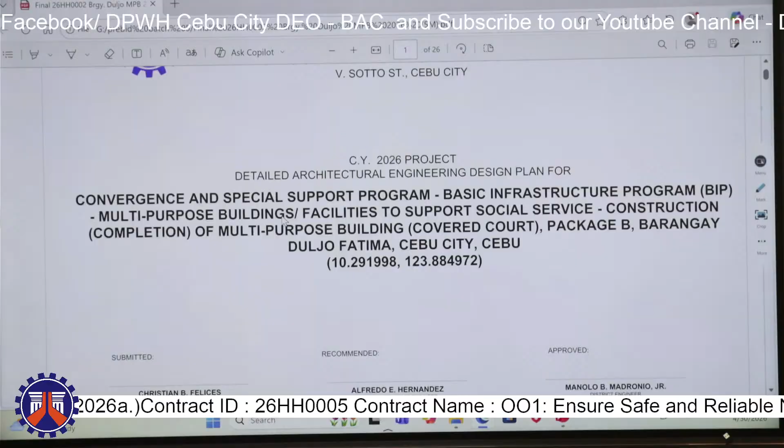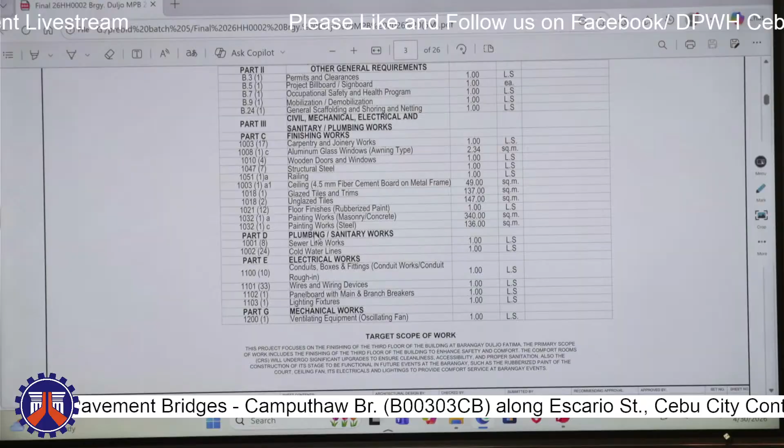The main scope of this project is the completion of the covered court at the third floor, the installation of the steel stage and railings, installation of tiles at the stairs and the CR, and the rubberized paint at the court, plus plumbing works, electrical works, and installation of the ceiling fan.

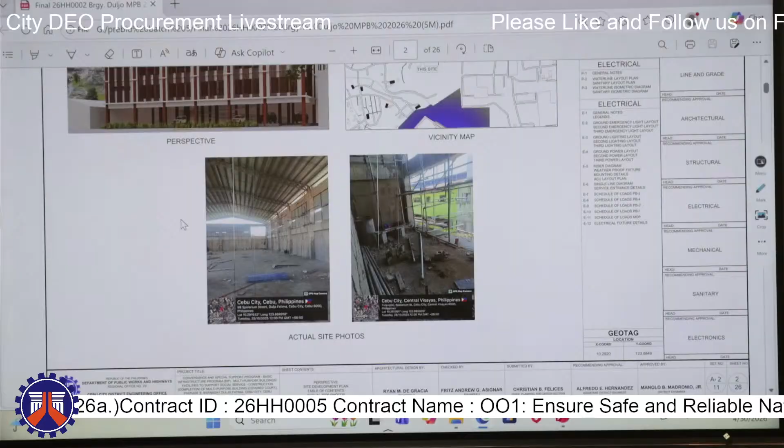This is the floor plan, the CR plan, the steel stage details, railing details, and these are the actual site photos.

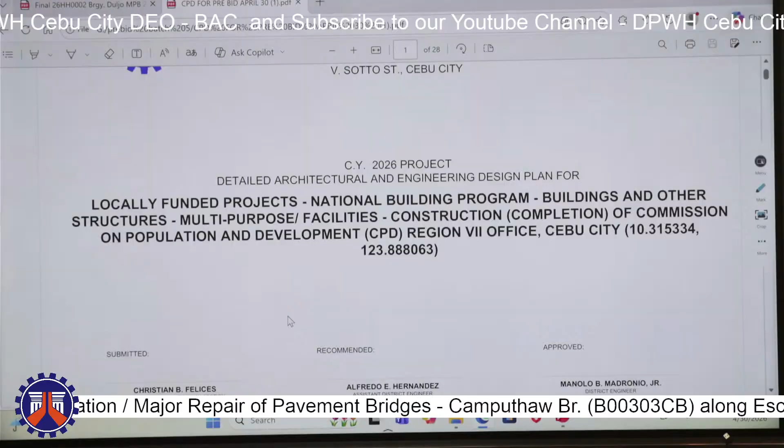Next project is locally funded, National Building Program, buildings and other structures, multipurpose facilities - construction, completion of Commission on Population and Development, CPD Region 7 Office, Cebu City.

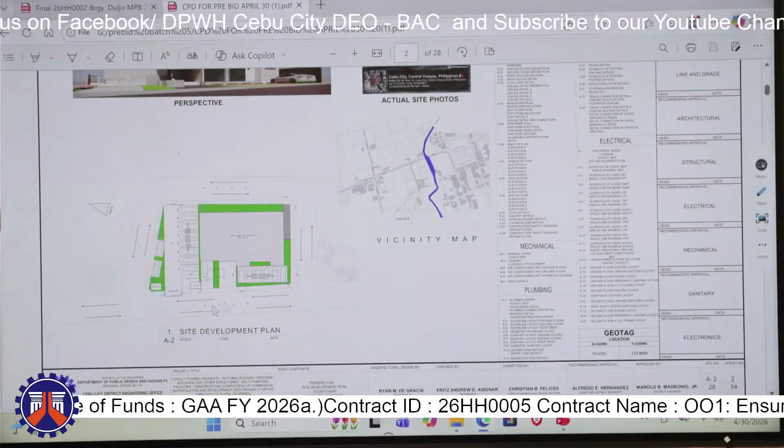This is already the completion phase of the remaining works from the previous projects. We have the perspective, the actual photo on site, the site development plan and vicinity map, then the summary of quantities and target scope of work.

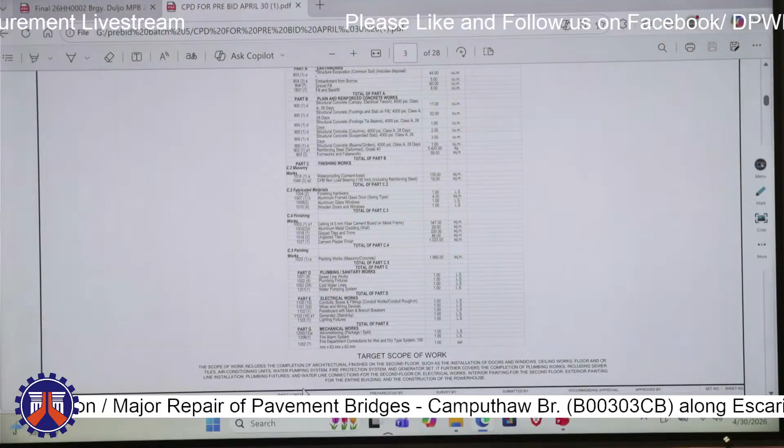The scope of work includes completion of architectural finishes on the second floor, such as installation of doors and windows, ceiling works, floor and CR tiles, air conditioning units, water pumping system, fire protection system, and generator set. It further covers completion of plumbing works, including sewer line installation, plumbing fixtures, and water line connections for the second floor, plus electrical works, interior painting for the second floor, exterior painting for the entire building, and construction of a powerhouse.

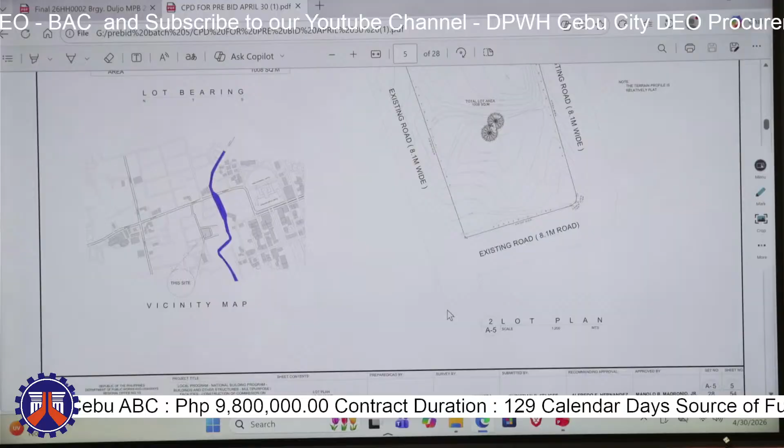Looking at the site development plan, the scope also includes concreting of the parking lot area, shown in this area here. The powerhouse to be constructed will be located on this corner.

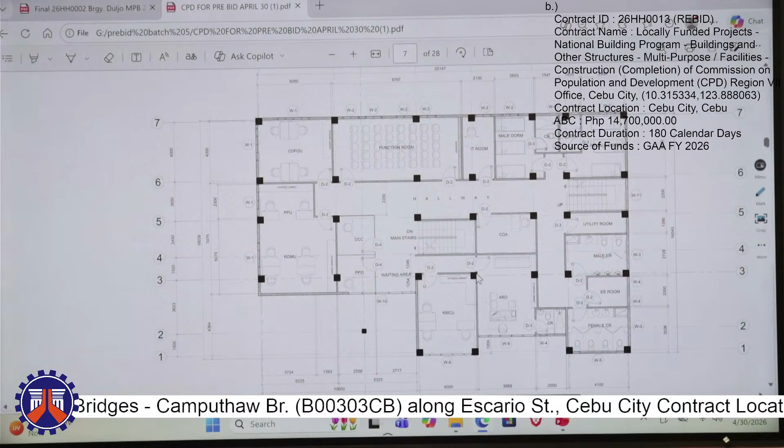Then we have the second floor plan. The scope for the second floor includes architectural finishes from floor to ceiling works - tiles, plastering of the walls, painting, installation of ceiling, installation of doors and windows, plumbing works for the second floor, electrical works, and fire protection system.

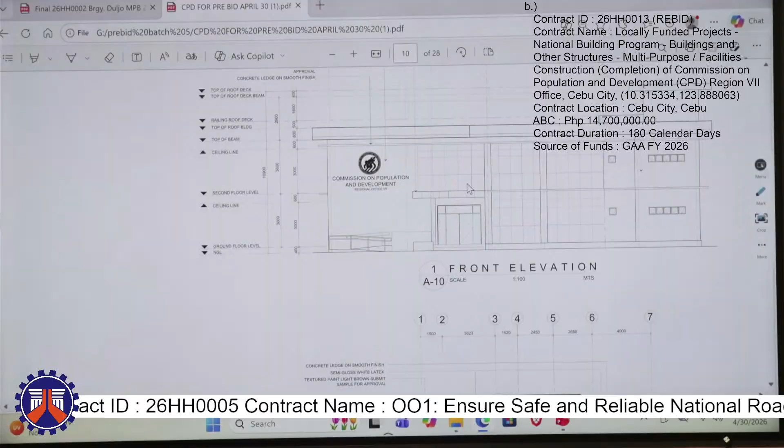Then we have installation of the water pump, and it also covers painting for the entire building - front, right, rear, and left side. That's all.

Next, the third building project is titled Locally Funded Projects, National Building Program, Buildings and Other Structures, Multipurpose Facilities - Construction of Cooperative Development Authority, Extension Office, Sudlon, Barangay Lahug, Cebu City.

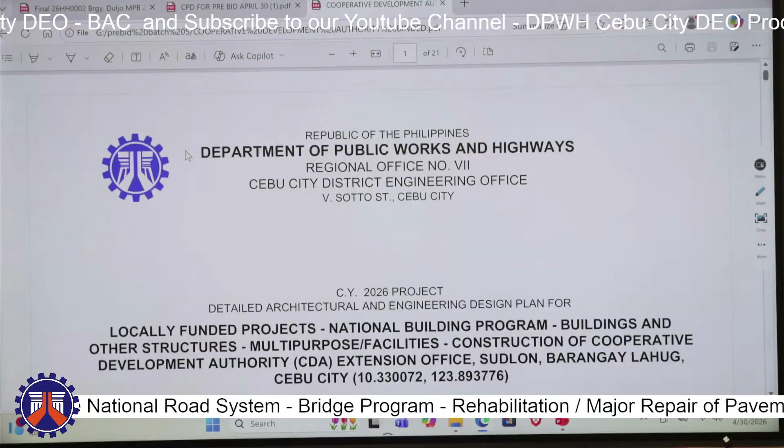This is the perspective, the vicinity map, and the lot plan. For the scope of work for the ground floor, it includes the backdrop of the RD's office, then the cabinets of the supervisor, registration, and finance.

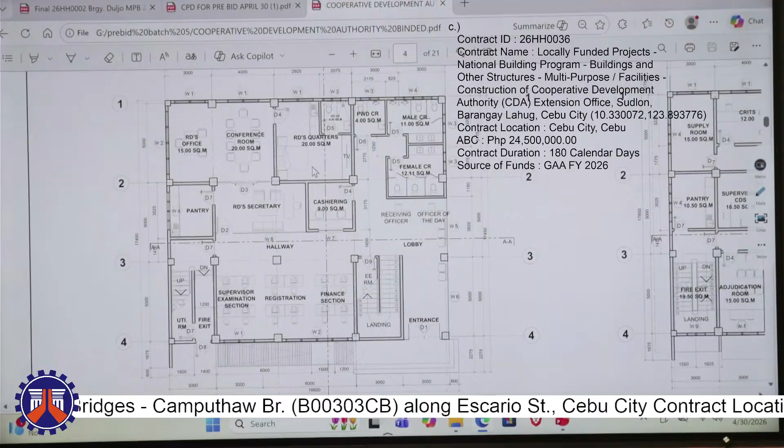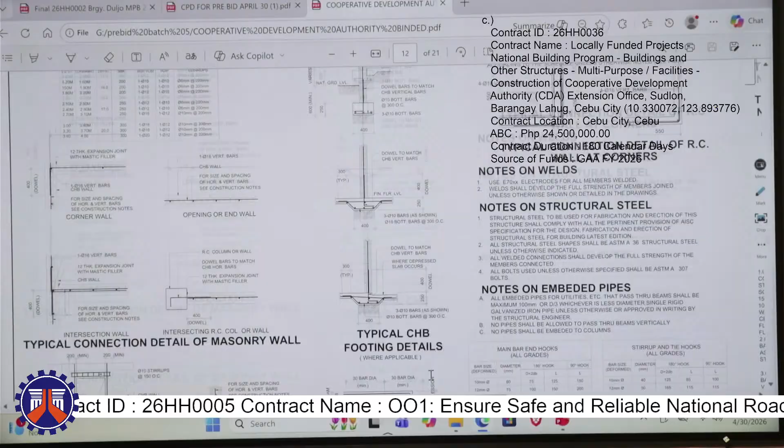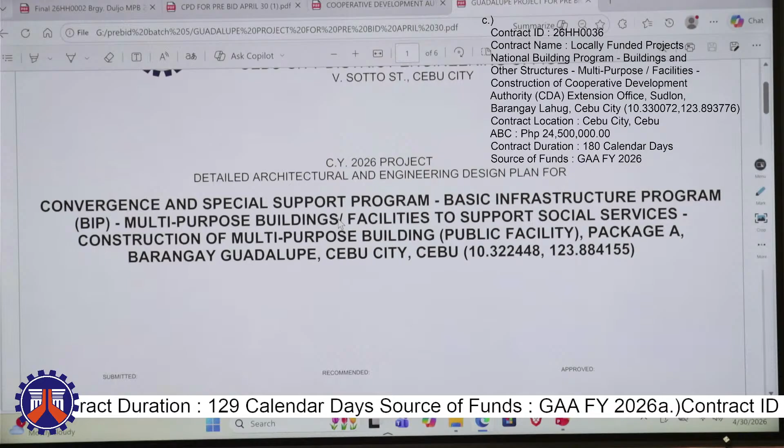Next project is Convergence and Special Support Program, Basic Infrastructure Program, BIP, multipurpose buildings or facilities to support social services. Construction of multipurpose building, public facility, Package A, Barangay Guadalupe, Cebu City, Cebu.

Here's the perspective of the project. This is a new construction of three-story, one basement, multipurpose public facility. The basement is designated for parking area.

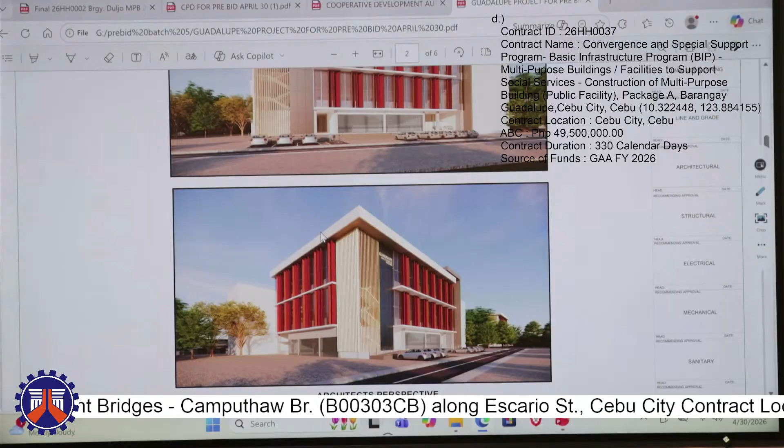For the ground floor, we have the commercial spaces at the front, then dry and wet market area at the back. We also have a mortuary on the left side.

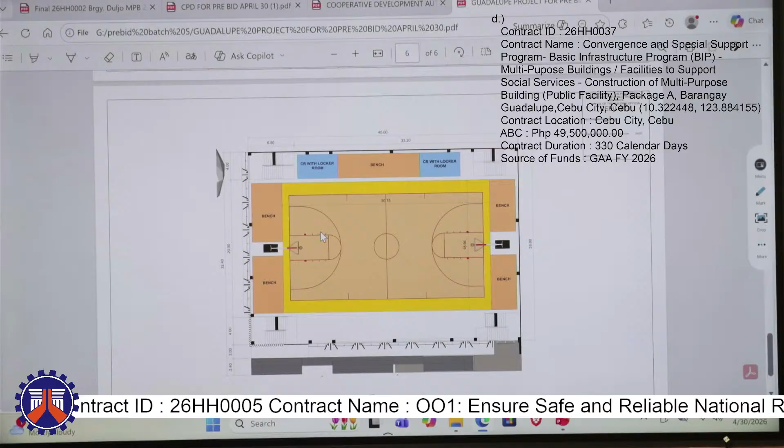For the second floor, it is an open area. Then the third floor has a full-size basketball court, which can be used during sports-related events or even to carry out community events or activities.

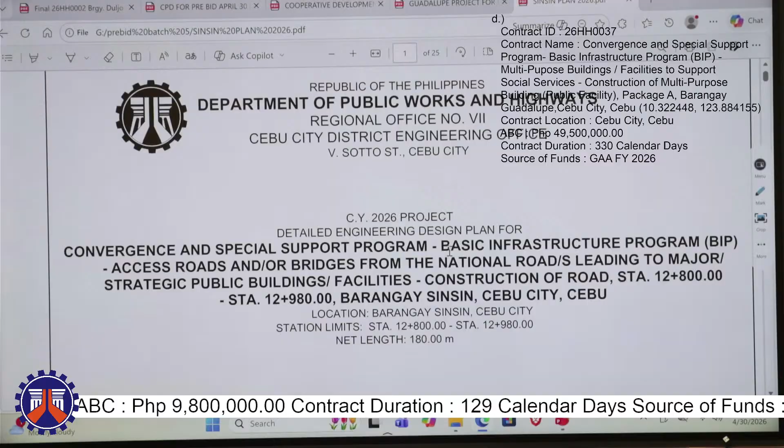Good afternoon, everyone. I'm here to discuss the project titled Convergence and Special Support Program, Basic Infrastructure Program, Access Roads and or Bridges from the national roads leading to major or strategic public buildings or facilities. Construction of road Station 12 plus 800 to Station 12 plus 980, Barangay Sinsin, Cebu City, Cebu, with net length of 180 meters.

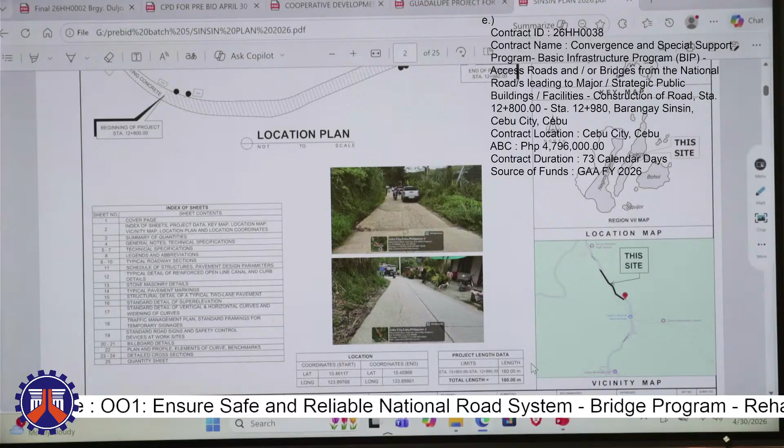So this is the location plan, also with the geotag photos to navigate to the location easily, as well as the vicinity map.

Here's the summary of quantities with the major scope of work being concreting of road. It also includes line canal on the left side, as well as concrete curbs, stone masonry, and pipe culvert to drain, RCPC.

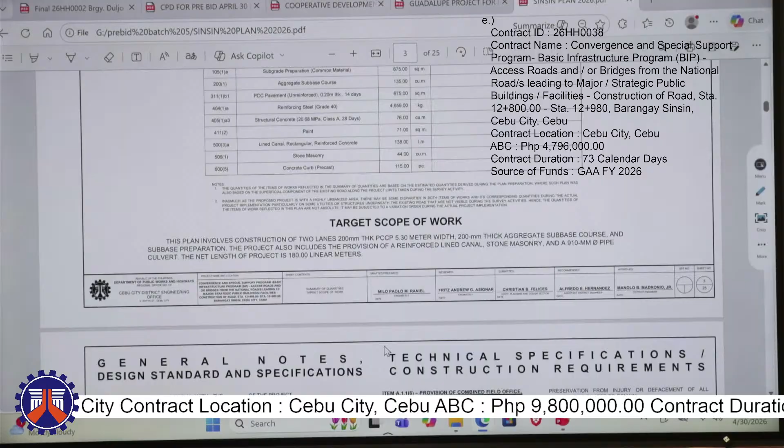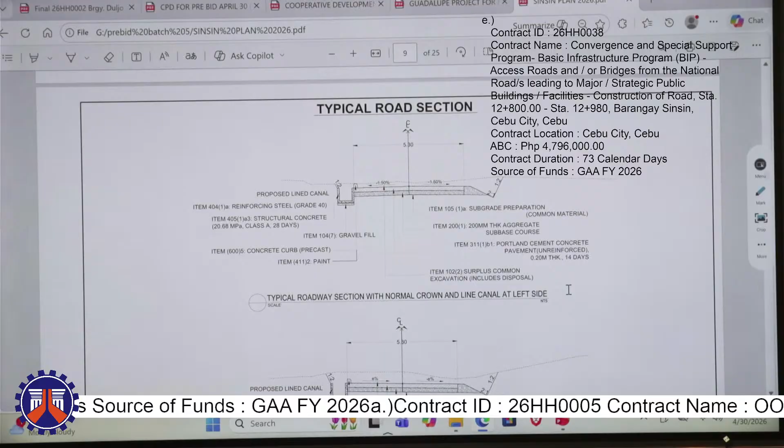So these are the general notes as well as the technical specifications included for this project, abbreviations and legend. For the typical roadway section, this is the typical roadway section with the normal crown and line canal on the left side. And here you will see the section with stone masonry on both sides as well as RCPC.

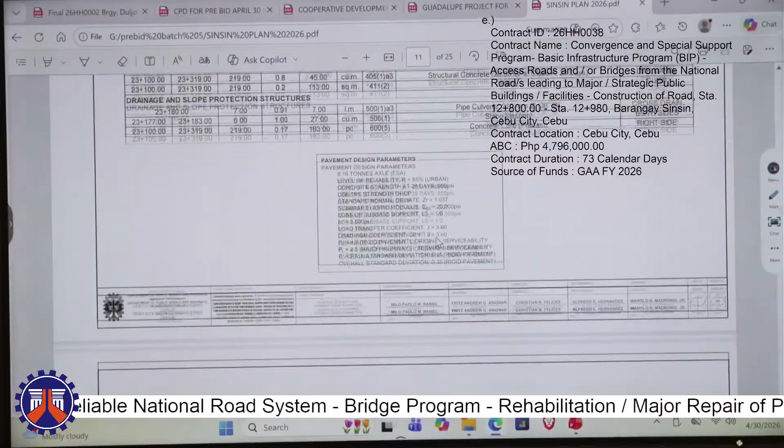910 millimeter RCPC. These are the schedule of structures for the curb and the line canal, typicals, stone masonry, typical pavement markings, standard detail of two-lane pavements.

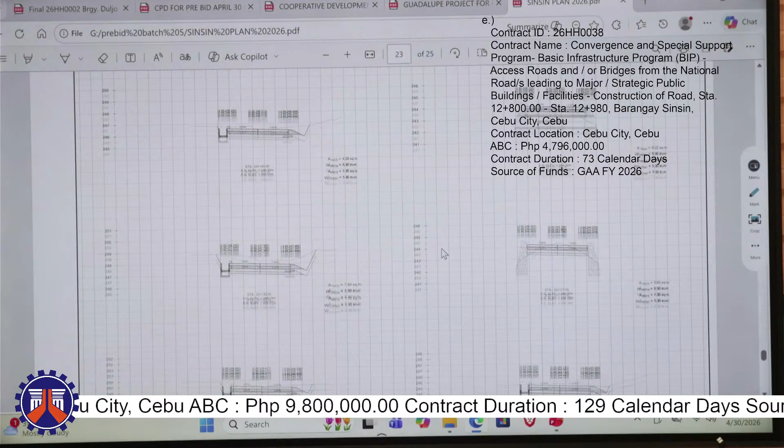This is for the super elevation, as well as the curves, the traffic management plan, road signs and safety devices, billboards, and here's the profile for the project, as well as the detailed cross sections and the detailed quantity calculations. That is all.

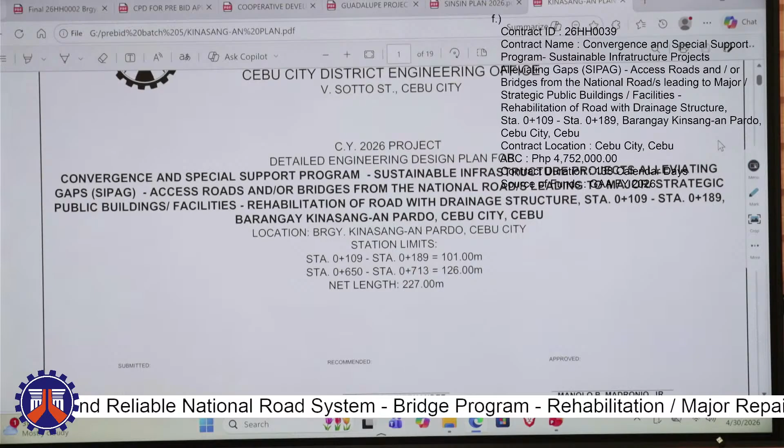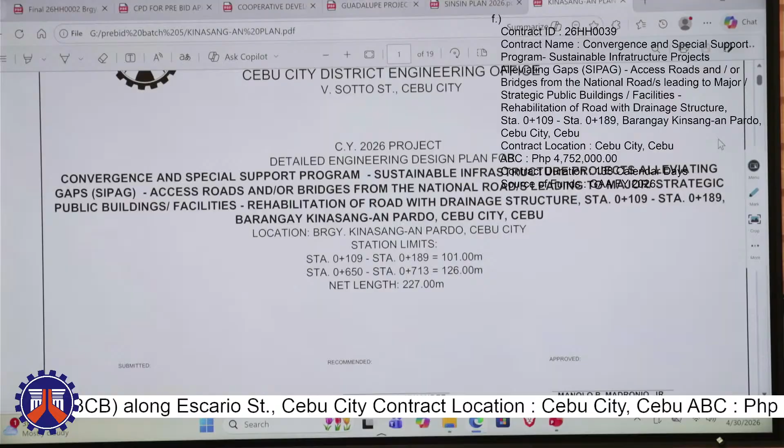Next is Convergence and Special Support Program Sustainable Infrastructure Projects Alleviating Gaps, Access Roads and or bridges from the national roads leading to major strategic public buildings or facilities, rehabilitation of road with drainage structure station 109 to 189 in Barangay Kinasang-an Pardo, Cebu City. Station limits station 109 to 189 in the length of 101 meters.

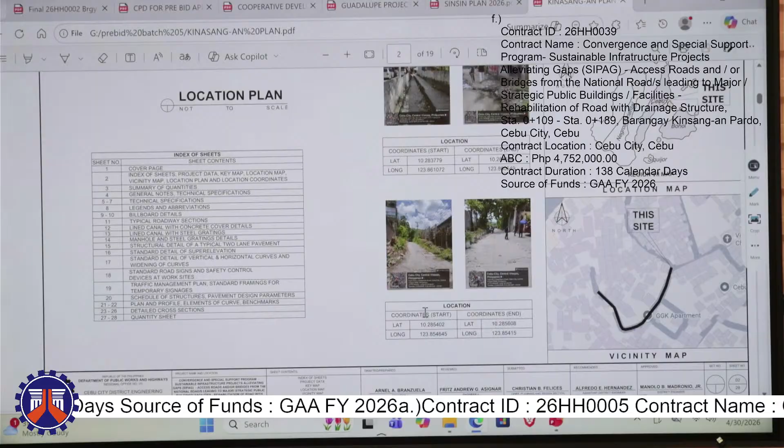Station 650 to 713 with a total length of 126 meters and a net length of 227 meters. This is the location plan of the site and geotag photos with coordinates for section 1, and for section 2 we also have the geotag photos and coordinates. Next is the summary of quantity.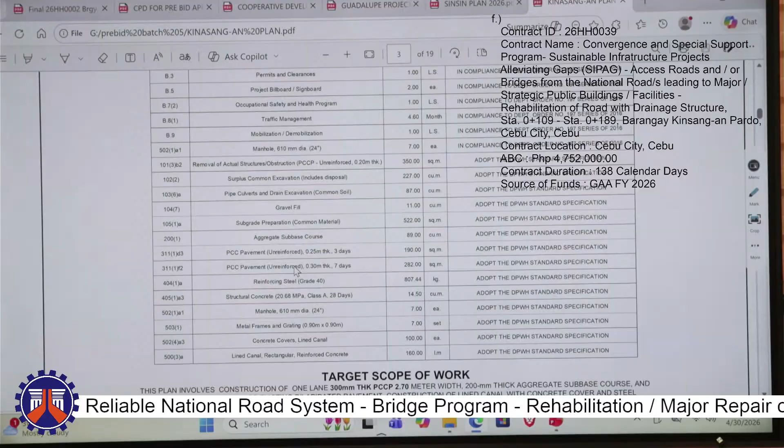Major scope of work is removal of PCCP 0.20 meters thick and PCCP 0.25 meters, and construction PCCP 0.30 meters thick, and for the reinforcing steel grade for the top slab of the line canal and also for the structural concrete. We also have manholes and steel gratings and line canal rectangular for reinforced concrete. So this is the general notes and technical specifications needed for the project.

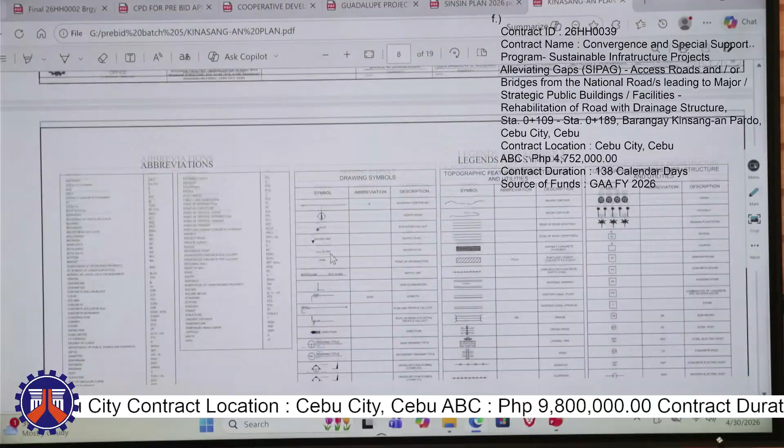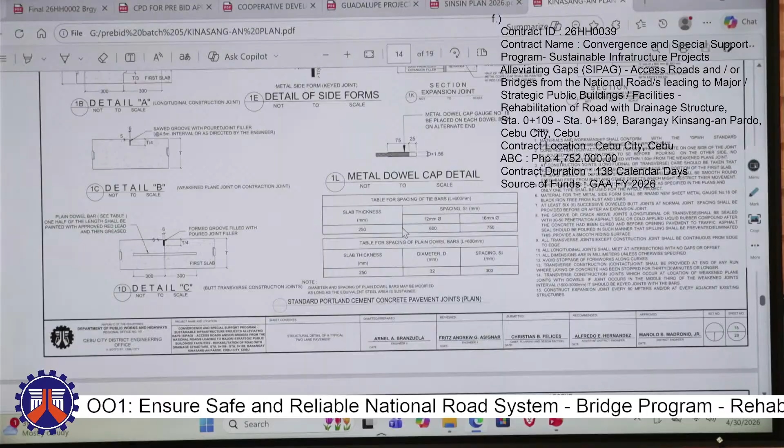This is the structural detail of typical two-lane pavement for the super elevation and curves, road sign and safety, and also the traffic management. And this is the schedule of structures.

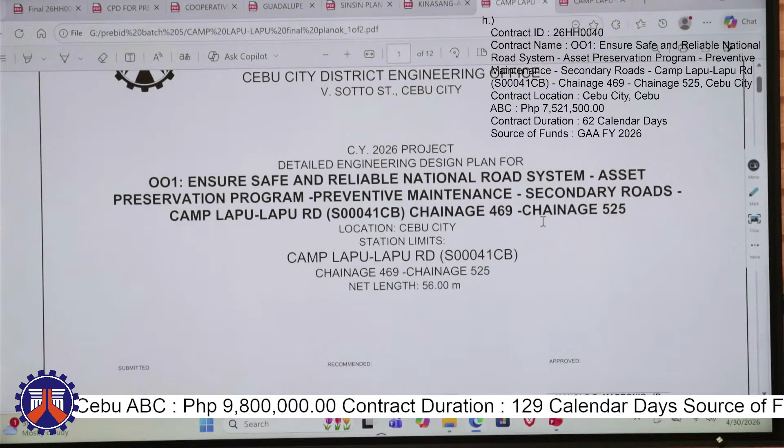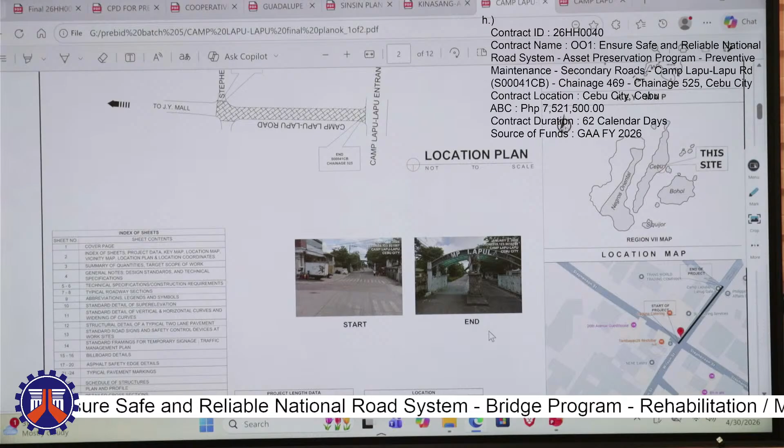The next project is a road project titled OO1 Ensure Safe and Reliable National Road System Asset Preservation Program Preventive Maintenance, Secondary Roads, Camp Lapu-Lapu Road, Chainage 469 to Chainage 525. Its net length is 56 meters. The location of the project is the junction before the Camp Lapu-Lapu entrance and its end is the Camp Lapu-Lapu entrance. Coordinates are provided as well.

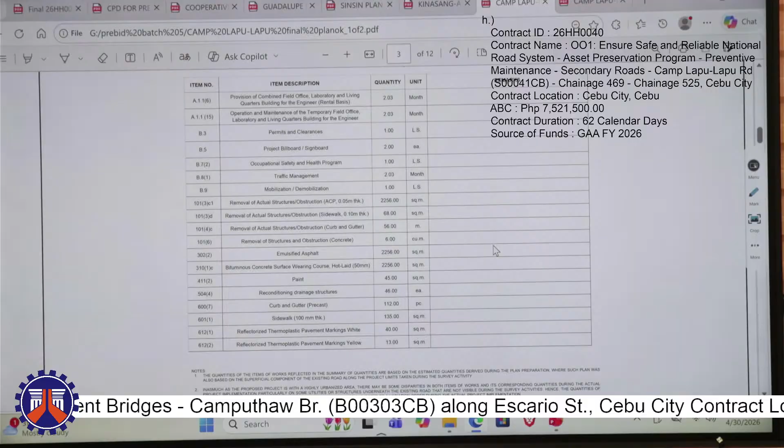For the major scope of work, it involves removal of existing asphalt, existing sidewalk, existing curb and gutter, and removal of existing concrete. Emulsified asphalt, bituminous concrete surface, wearing course, hot laid, paint, reconditioning of existing drainage, precast curb and gutter, sidewalk, and reflectorized thermoplastic, both white and yellow.

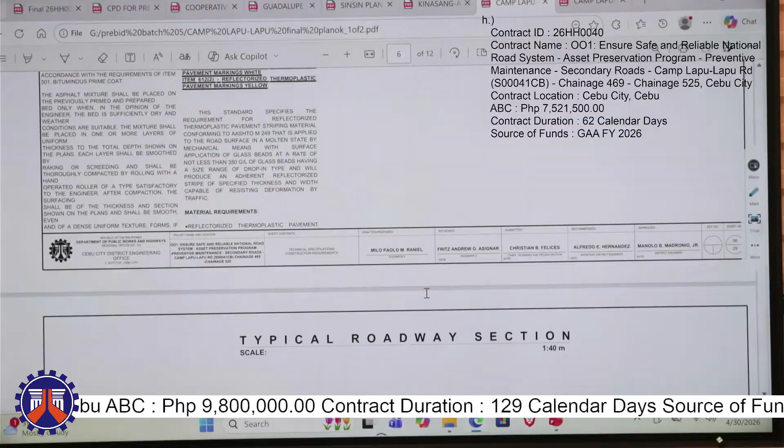These are the technical specifications of the project, and this would be the typical cross section for the project. That's all.

Next project, we have Convergence and Special Support Program, special road fund, motor vehicle users charge, MVUC, as per RA 11239. Installation and application of road safety facilities, roadway lighting along J. Luna Avenue.

Section S00024CB, chainage 000 to chainage 1508; S00324CB, chainage 000 to chainage 144; S00330CB, chainage 000 to chainage 1501, with a total net length of 3,153 meters.

Our project starts at San Jose de la Montaña Bridge going to the Archbishop Flyover, at the junction of Salinas and Governor Cuenco.

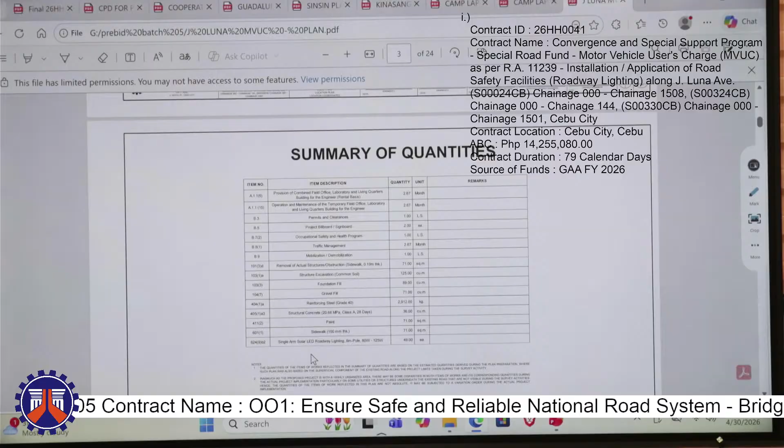So our summary of quantities. Since our project is roadway lighting, we have single arm solar LED roadway lighting. We also have structure excavation, removal of sidewalk, and for the restoration works, foundation fill, gravel fill. For our pedestal, we have reinforcing steel, structural concrete, paint, and sidewalk.

This one is the general notes and technical specifications involved in this project. Next, legends and symbols, then our typical roadway sections.

We have first solar street lights installed on both sides, then this one is for staggered arrangement.

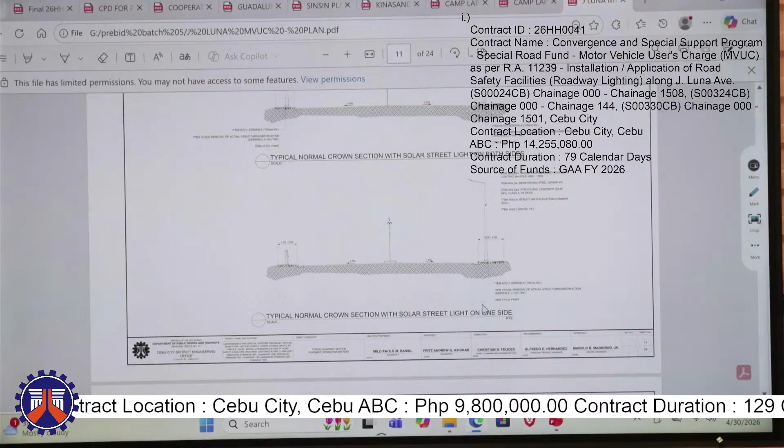Next is our site development plan, our schedule of structures, then details of our sidewalk. Then this one is the general notes for our roadway lighting.

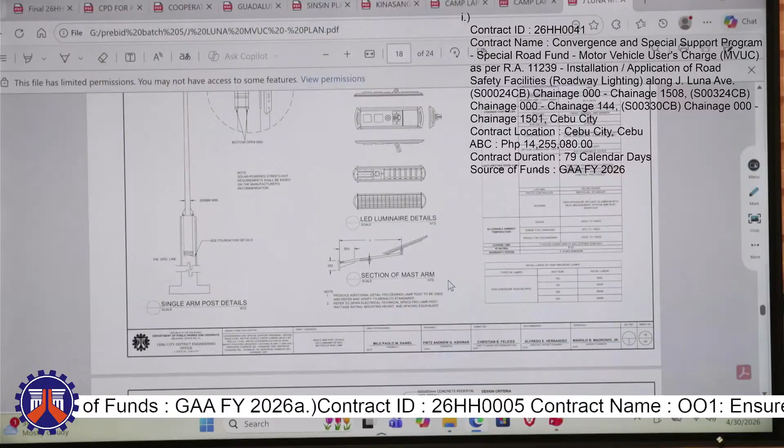Then details for our LED lighting, details for our pedestal. This one for our arrangement of the lighting layout. Then our traffic management, then billboard details. And that's all for this project.

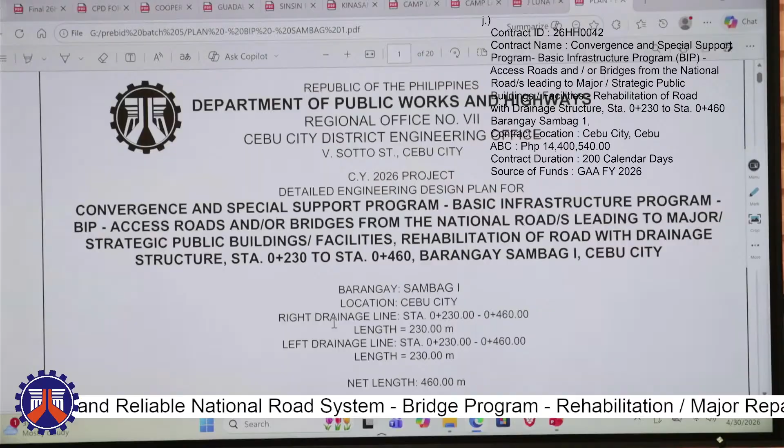Good afternoon, everyone. For the next project, titled Convergence and Special Support Program, Basic Infrastructure Program, BIP, access roads and/or bridges from the national roads leading to major strategic public buildings, facilities, rehabilitation of road with drainage structure, Station 230 to Station 460, Barangay Sambag-Uno, Cebu City, with an ABC amount of 14,400,540 pesos and 200 calendar days.

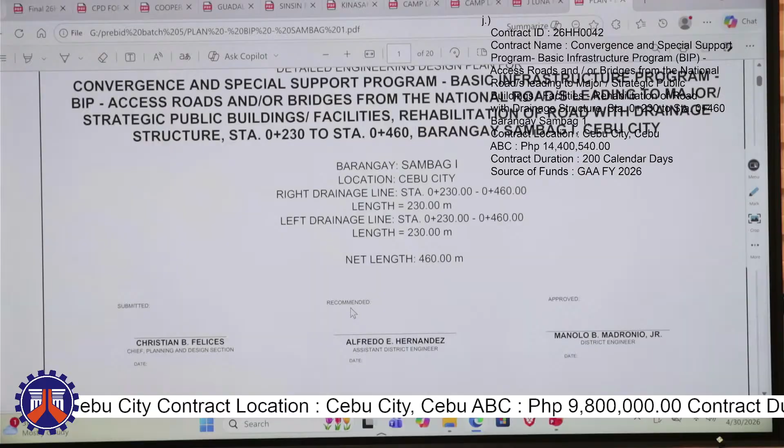The location is on Barangay Sambag-Uno, Cebu City, with drainage line 230 and 460 on both sides, with a net length of 460 meters. Here's the location, the project will start at station 230 and end at 460 on both sides. Here are the location and geotags for easier navigation of the project and also the limits.

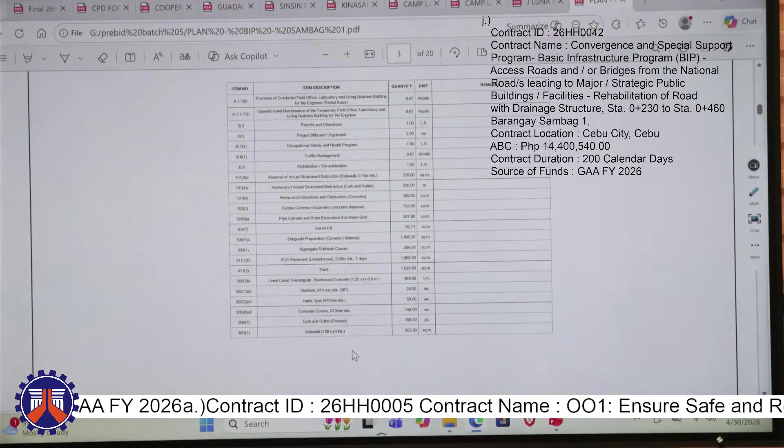For the major scope of works, we have removal of actual structures and obstruction for sidewalk and curb and gutter, also for concrete, surplus common excavation, pipe culverts and drain excavation, gravel fill, subgrade preparation, aggregate sub-base course, PCCP, paint, lined canal, manhole, inlets, concrete cover, curb and gutter, and sidewalk.

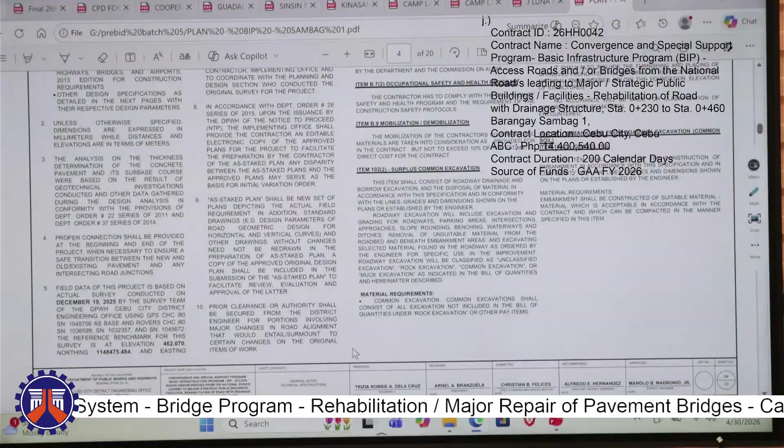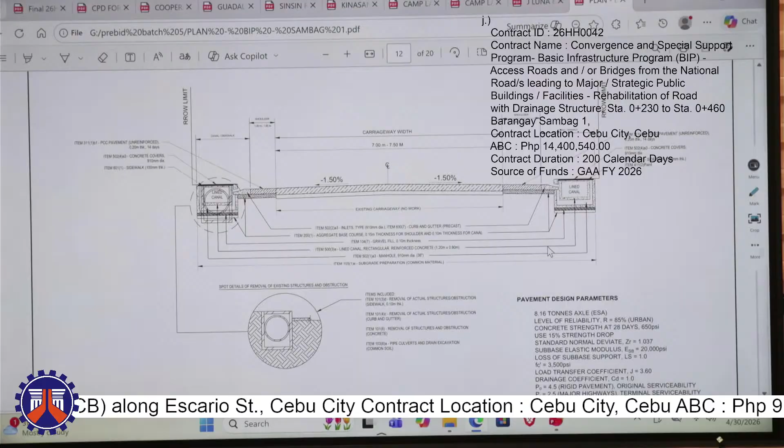We will move on to the typical roadway section. Here is a typical roadway section. Again, for both sides, it will be construction of a shoulder with lined canal and manhole with sidewalk. Here is the schedule of structures for the whole project. And that will be all for this project.

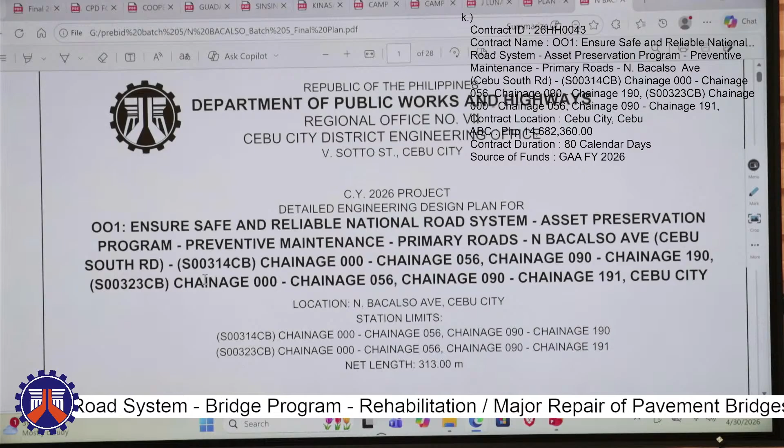So for the next project, we have here titled O1 Ensure Safe and Reliable National Road System Asset Preservation Program, Preventive Maintenance Primary Roads in Bacalso Avenue, Cebu South Road. The first section will be S00314CB, chainage 0 to 56, chainage 90 to 190, and then another section ID 323CB, chainage 0 to 56, chainage 90 to 191, Cebu City.

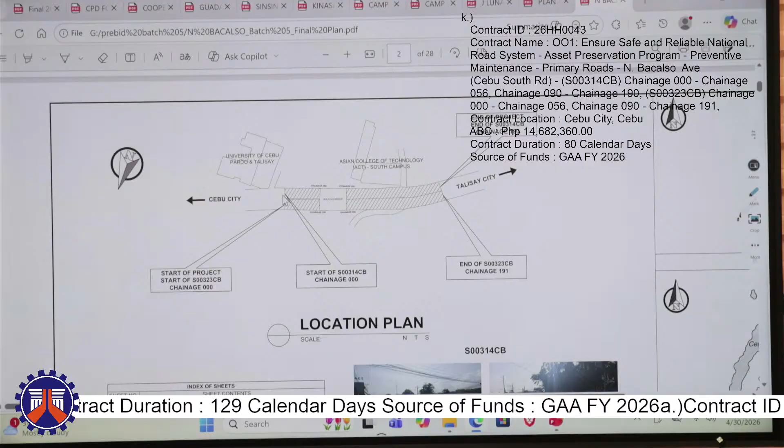Location in Bacalso Avenue, Cebu City, with a total net length of 313 meters. So here we have the location plan. It is located along University of Cebu, Pardo Talisay, the start of the project, and then ends at the boundary of Talisay City and Cebu City.

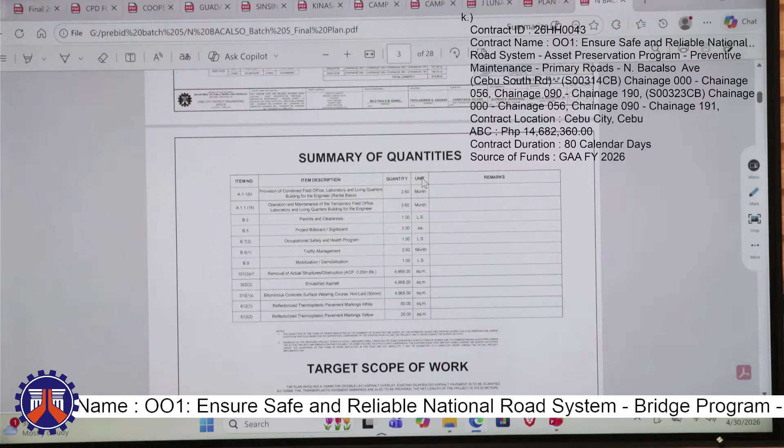For the major scope of works, we have removal of ACP, emulsified asphalt, bituminous concrete surface wearing course, and then provision of thermoplastic, both white and yellow. So for the typical roadway section, we have here. So I guess that would be all for this project.

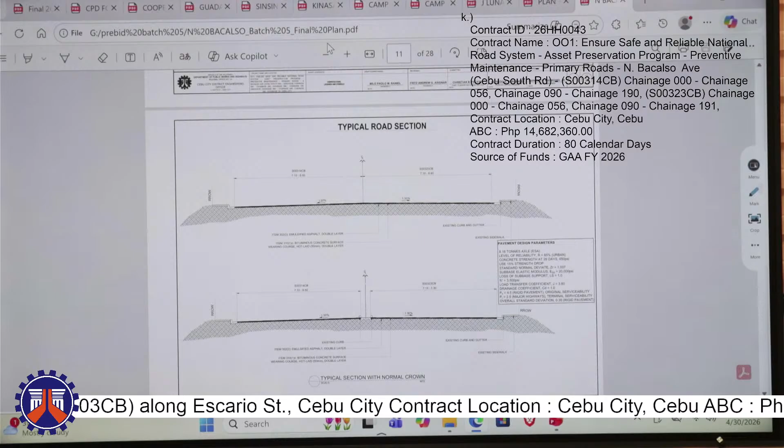Good afternoon, everyone. I would like to discuss about the project entitled O01, Ensure Safe and Reliable National Road System Bridge Program, Rehabilitation, Major Repair of Permanent Bridges, Gov. Cuenco Flyover along Gov. Cuenco Avenue, Cebu City, with the station limits Station 000 to Station 410.5. The location of this bridge is between Banilad and A.S. Fortuna, as also located here in the geotag pictures.

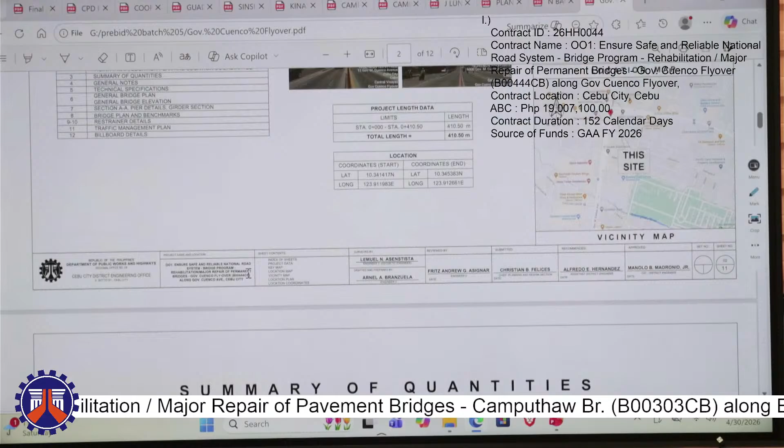Its length is 410.5 meters, with the location plan also stated here. Its major scope of work is the installation of chain type bridge unseating prevention restrainers.

Here's the general notes, technical specs, and the scope of work will be installed at the highest points, which is in Pier 3 and Pier 4 of the flyover. And this is all for this project.

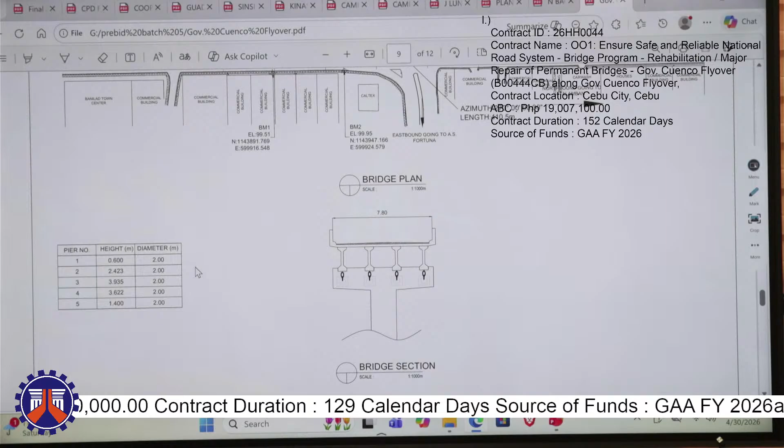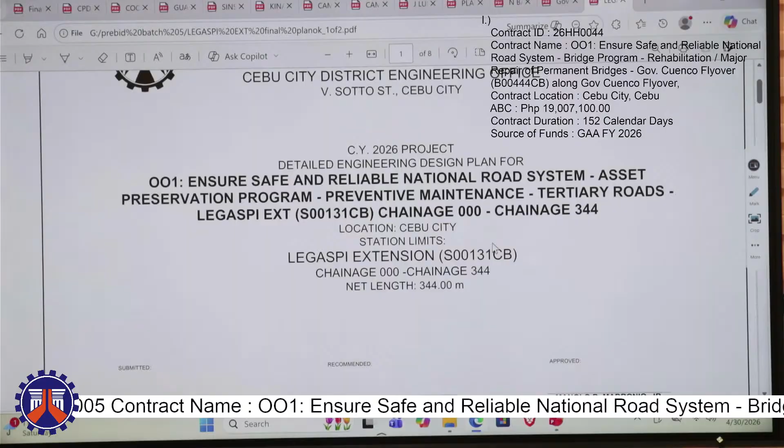The next road project is entitled O1 Ensure Safe and Reliable National Road System Asset Preservation Program, Preventive Maintenance Tertiary Roads, Legaspi Extension, chainage 0 to chainage 344, with the net length being 344 meters. The project is located at Pier 1, and it would end at the side of Jollibee.

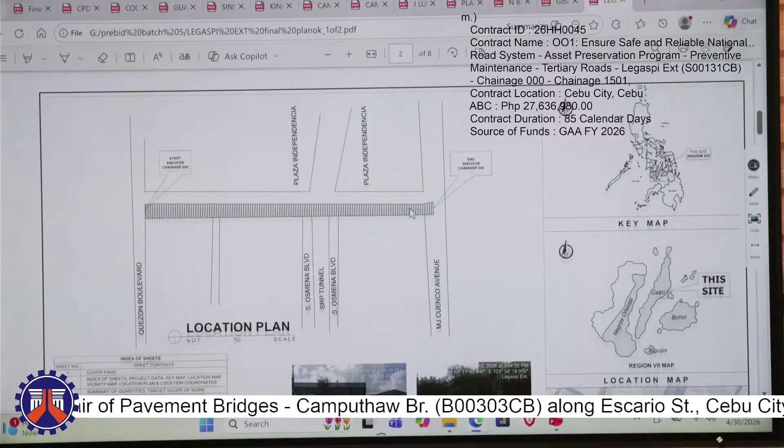Here are its pictures, the start and the end accordingly, and coordinates as well.

For the scope of work, we have removal of actual structures, sidewalk, removal of actual structures, obstruction curb, removal of existing curb and gutter, emulsified asphalt, bituminous concrete surface wearing course hot laid, paint, reconditioning drainage structures, curb and gutter, sidewalk, and reflectorized thermoplastic white and yellow.

Here are the technical specifications, and this would be the typical roadway section for this project. That would be all.

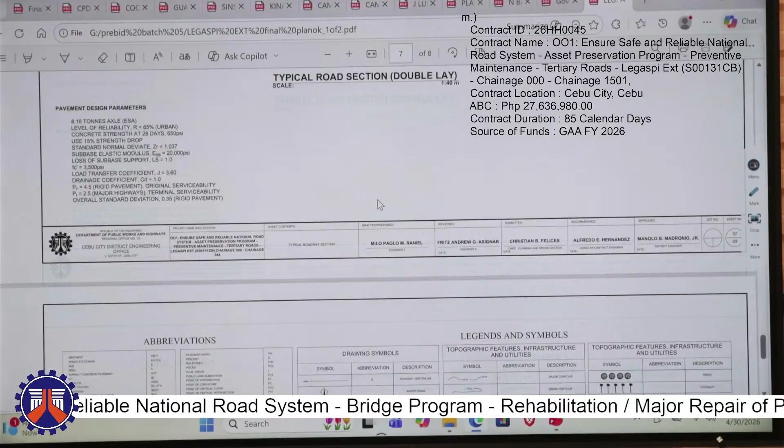So for the next project, it's titled 001 Ensure Safe and Reliable National Road System Bridge Program Replacement of Permanent Weak Bridges, Santiago Bridge, B00306 CB along Santiago Street, Phase 3, Cebu City. This project has an approved budget of contract of 35,536,760 pesos with a contract duration of 234 calendar days.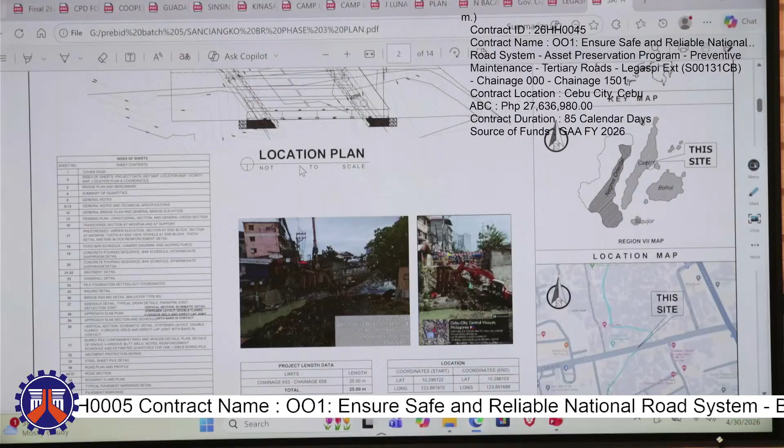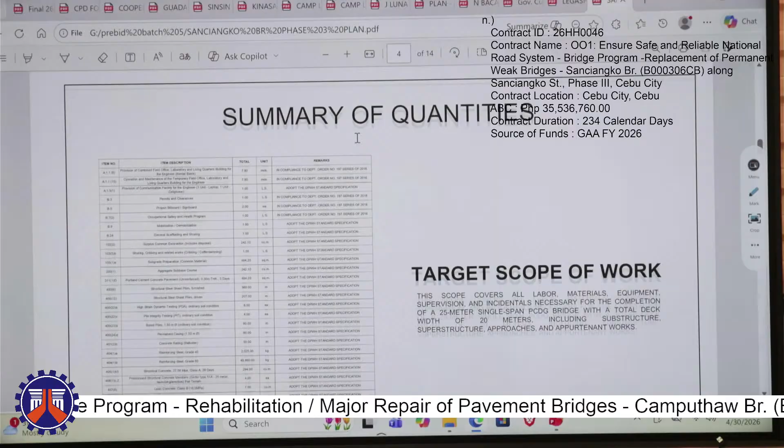It's located in Sanciangko Street, Cebu City, with station limits of chainage 633 to 658 with a total bridge length of 25 meters. This is the location plan and the ongoing site with geotag photos, the project length data and location with the index of sheets. Next is the bridge plan with the benchmark, then the summary of quantities. The major scope of work is the completion of the bridge itself with pre-stressed girders and the substructure. Next is the general notes, technical specifications and detailed drawings of the project. That's all.

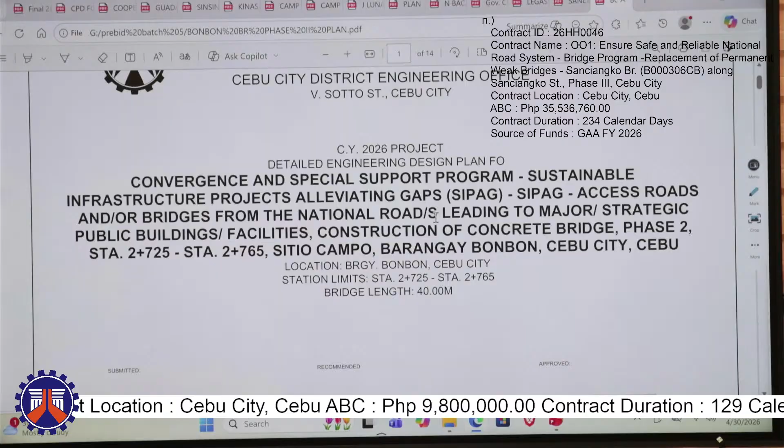Next project is the Convergence and Special Support Program, Sustainable Infrastructure Projects Alleviating Gaps (SIPAG), access roads and or bridges from the national roads leading to major strategic public buildings and facilities, construction of concrete bridge, Phase 2, Station 2725 to Station 2765, Sitio Campo, Barangay Bonbon, Cebu City, Cebu. The approved budget of contract is 39,979,100 pesos with a contract duration of 275 calendar days, located in Barangay Bonbon, Cebu City, with station limits of Station 2725 to 2765 and a total bridge length of 40 meters.

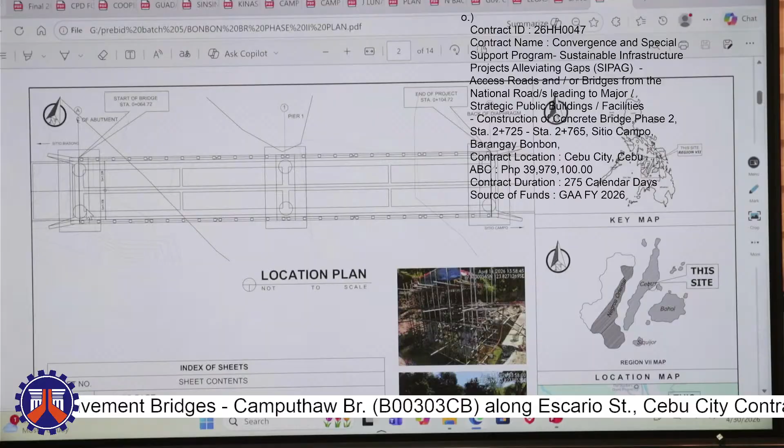So this bridge is all about completion. The first phase has been completed with abutment A with coping beam, and the pier with abutment and coping beam. These are the geotag photos, the location, project length data, and vicinity map. Next is the bridge plan with bridge benchmark and summary of quantities.

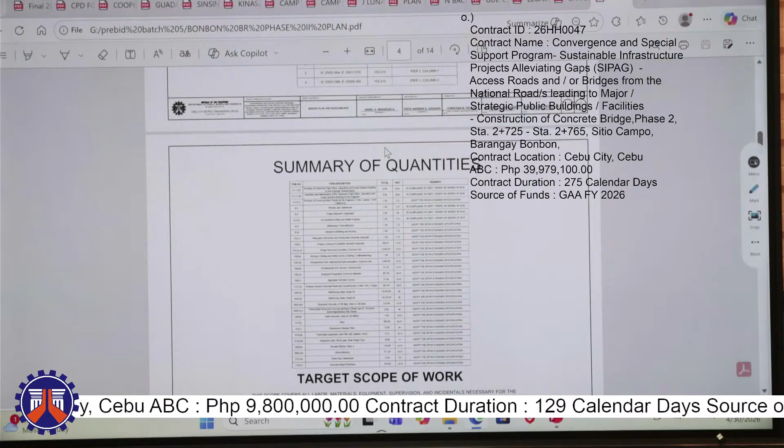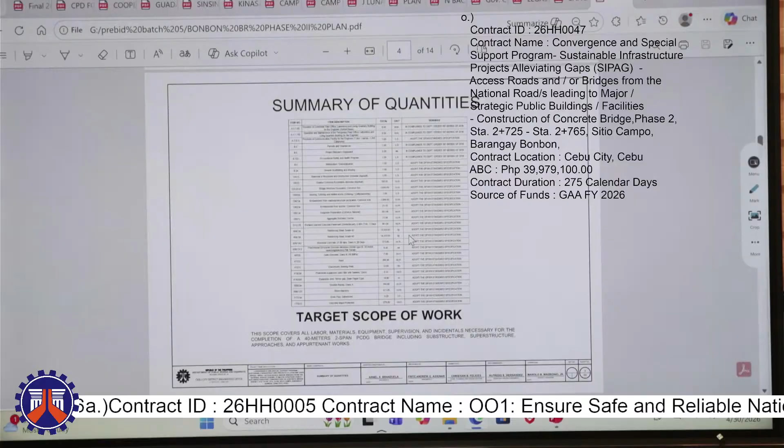The major scope of work of this project is the completion of the project, which consists of pre-stressed girders with Type 3 AASHTO girder, a 20 meter span. We will install elastomeric bearing pads and grouted riprap and stone masonry for slope protection, and PCCP for the bridge approach slabs. Next is the general notes and technical specifications and the detailed drawings of the plan, which comprise plan and elevation.

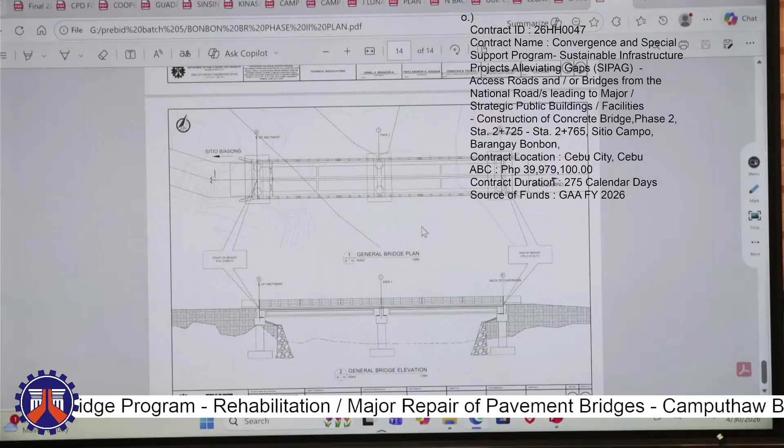Our last project for this pre-bid conference, we have 001 Ensure Safe and Reliable National Road System Asset Preservation Program, Preventive Maintenance, Secondary Roads, Cebu, Balamban, Trans Central Highway, K0010 plus 726 dash K0011 plus 274, K0011 plus 405 dash K0013 plus 515. Net length of 2,658 meters.

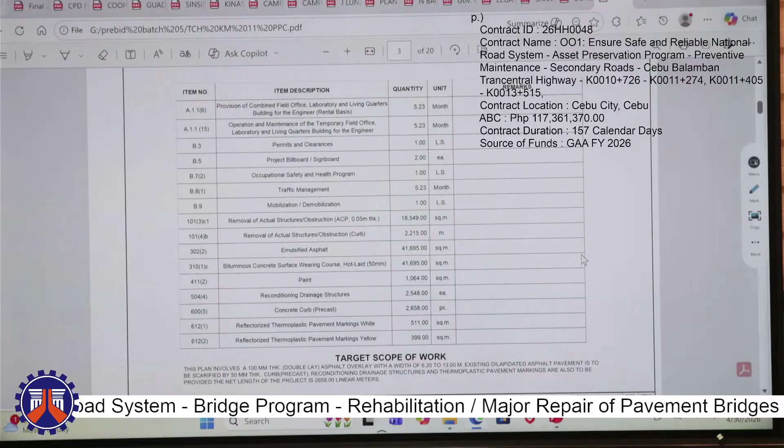Our project starts at kilometer 10 plus 726. Then our section starts at kilometer 11 plus 405. This is along Cebu Balamban Trans Central Highway. In our summary of quantities, our major scope of works includes emulsified asphalt, bituminous wearing surface course, hot laid. Also we have removal of ACP and removal of curb. Painting is also included for repainting of curb, then reconditioning of drainage structures, concrete curb, reflectorized thermoplastic pavement marking white and yellow. This is our general notes and standards, technical specifications of this project.

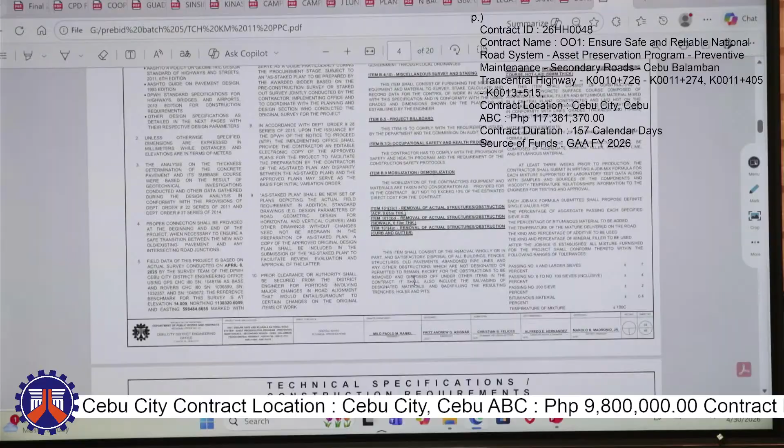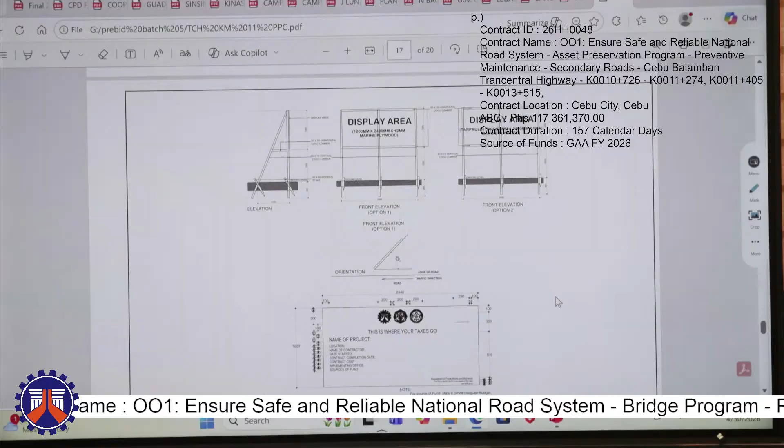Okay, so my question to the representatives from the construction firm - do you have any concerns? Yes, go ahead.